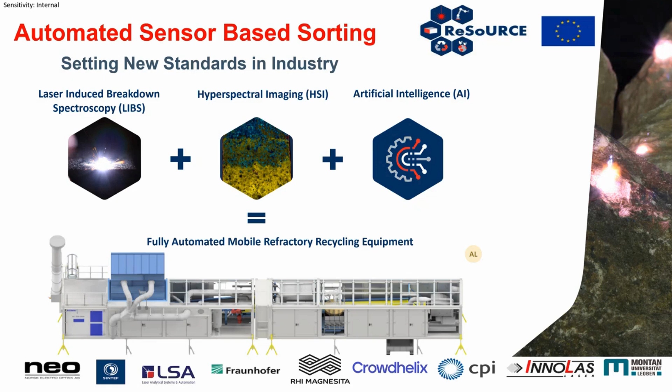So that will be the main aim here, to create new qualities of materials, and whenever we create new quality of sorted materials, this will usually also leave over some other residues where we might not have a full application or the best valorized application today. And that's actually what brings us to this topic today.

And at this point, I would like to hand over to Ananda now. He will introduce further the materials and the project setup here. Thank you.

So this is the ReSoURCE partners. Thank you for your wonderful introduction, by the way, Alex, much appreciated. And this is the ReSoURCE partners. We are a team, and some of these resource partners are also there in this workshop, I believe.

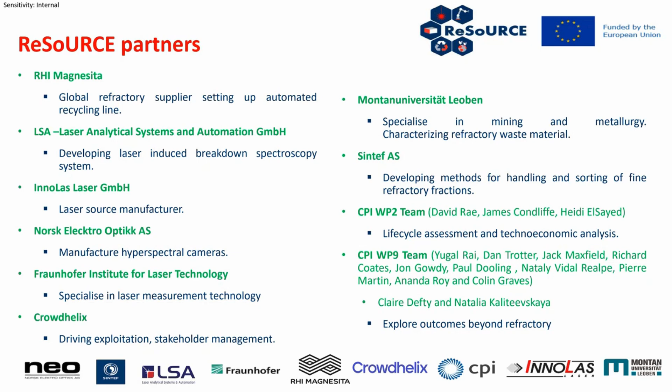And from CPI, we are mainly present in two work packages. The work package 2, which is life cycle assessment and techno-economic analysis. I believe once we go forward with the next few slides, it will be more apparent why this is kind of a very high consideration. But I am representing today from work package 9.2.

Work package 9.2 is a big team where we are exploring areas which are beyond refractory. So we are selecting the material, as Alex pointed out in the earlier slides, which is the most challenging to recycle. That 30% or so fraction of 0 to 5 millimeter, and we are trying to incorporate it into a suitable polymer matrix, and we are exploring new areas of application, whether this can be effectively utilized in value-added applications.

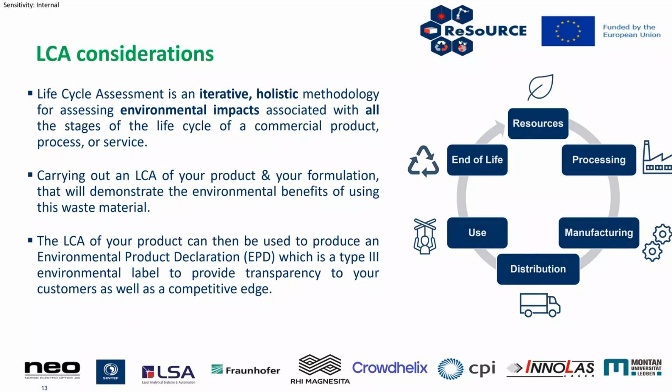Now, in the next few slides, our colleagues will be talking in a little more detail on that. But just to clarify, we will be mostly talking about two materials here. One is a steel industry-based 0 to 5 millimeter size fraction. We will henceforth call it ref ferro. And the cement industry one, we will be calling it Ref Cem.

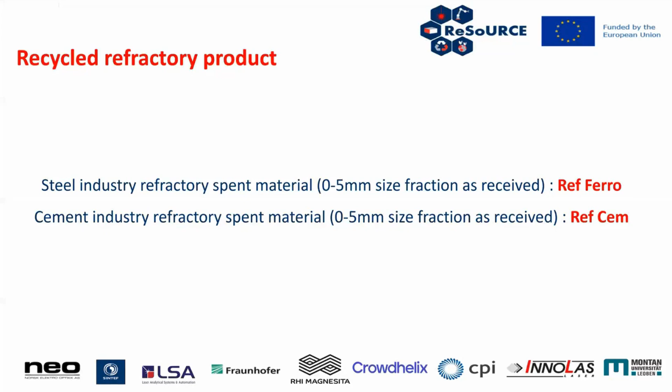So in the next few slides, one of my colleagues, Jack, will be talking about the characterization part. We need to understand this material first quite well in order to incorporate it and to find a suitable application area. And then we will highlight some examples of the application areas that we have worked with. So without wasting any time, I'm handing over to Jack to talk about the characterization of these materials. Thanks, Ananda.

So as Ananda mentioned, these are spent materials. So to figure out how we were going to be able to use these materials and what we might need to do to use them, we began a characterization study.

So we first looked at the chemical composition of these spent materials. And broadly, we can see that they're comparable to what we might expect is used within the bricks. So for instance, we see a lot of magnesium oxide in there and calcium species like calcium carbonate. We see these across a range of different characterization techniques: the XRD, FTIR, EDX, and the Raman.

And we also see some potential impurities which have been added through processes that these materials have gone through. So for instance, we can see potassium within the material from the cement industry, which is potentially added in the cement production process.

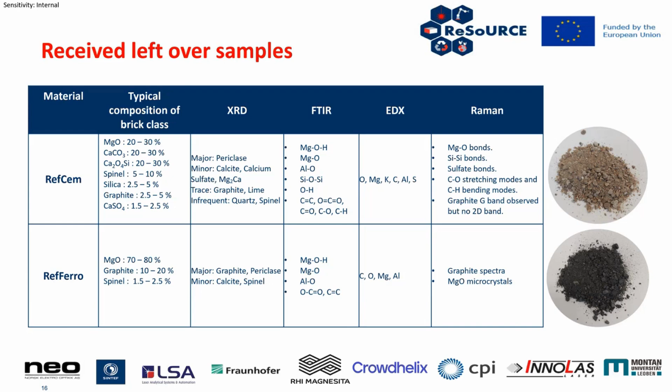We also looked at the particle size distribution of these two materials. So we received two materials that were pre-sorted to below 5 millimeters. And within this size fraction, we see bimodal distributions, centered around 200 micrometers and 1700 micrometers.

And we also looked at the bulk and skeletal densities of these materials. So the skeletal density here doesn't take into account pores and voids when it calculates the density. We see from skeletal density that these are reasonably high density materials, both above 3 grams per centimetre cubed.

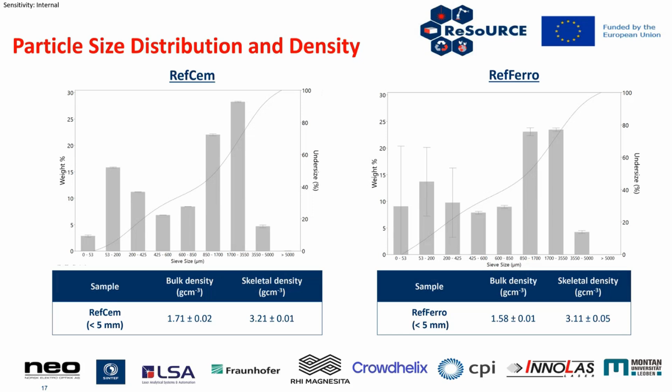We also had a look at the physical properties of these materials. So having a look at the electrical resistivity, the dielectric permittivity, and the magnetic permeability. Whilst we don't see anything that's particularly of interest to us in the magnetic properties, we do see quite interesting properties in the electrical and dielectric properties, and we see a difference between the two materials.

So for the cement industry material, we see a reasonably high electrical resistivity and a reasonably high dielectric permittivity in this material. Whilst for the ferro material, we see it's a reasonable conductor. And again, in the dielectric permittivity, we see that it's an inductor. So, for instance, with the RefFerro material, this conductivity is on a kind of par with carbon black. So that's an area that we could potentially look to use this material in, replacing things like carbon black.

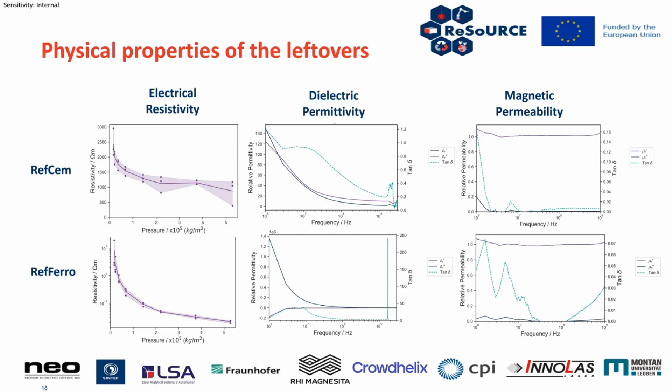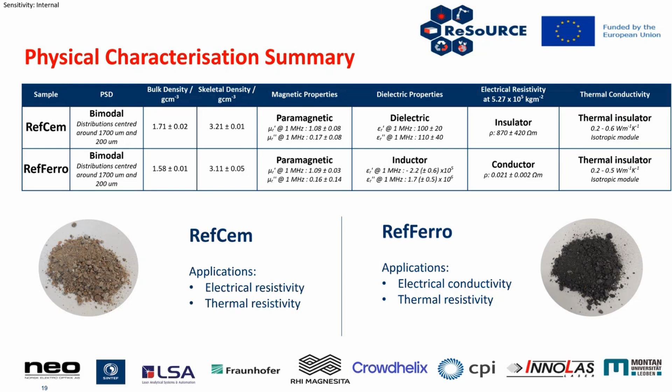So just to summarize there, we have had a look at the characterization of these two materials. We see that they're both bimodal particle size distributions, and their interesting properties really are in the dielectric and electric properties. And we see that we can potentially use the RefCem material for electrically resistive applications, whilst the RefFerro material we can potentially use for electrically conductive applications. Both these materials are also thermal insulators, as we would expect, and so they can potentially be used for thermal resistivity applications as well.

So as these materials have a bimodal size distribution up to 5 millimeters, for certain applications, we realize that we need to do some processing of these materials to put them into applications. So for instance, to put into a polymer system, we need to process these materials down to a size class with a D50 below 10 micrometers. So we process these materials by milling. We first began in the lab on a benchtop scale with about 10 grams of material, using a planetary ball mill to reduce this to below 10 micrometers in size.

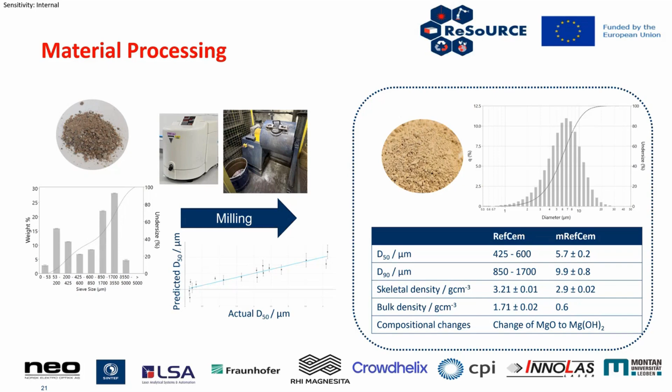We also performed some leach testing on these materials to see if there's any mobile ions present. We can see that there are some mobile ions, and these can be explained by the processes that these materials have gone through. So for instance, with the mRefCem material, we see the potassium and the chlorine that can be expected from the cement production industry.

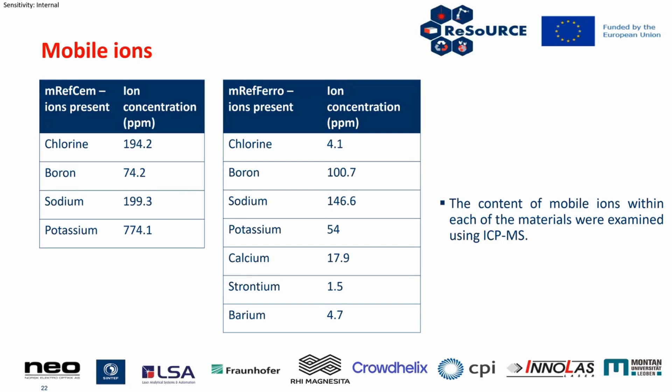So I'll pass over to my colleague Dan now, who will talk about a material passport that we've created to help us identify potential use cases for these materials. Thank you, Jack. So as Jack mentioned, we did then take all of the results from the analysis that we've done of this milled material, this size reduced material, and put it into a material passport for both of the materials. So this is some of the information present there.

So we have some information about colour. That is the colour of the batch that we received. Obviously, with it being a waste material, there's still analysis that needs to be done to see how reproducible that colour is. Also, you can see there the main changes from the magnesium oxide to hydroxide.

And so, residual moisture content. These materials pick up a slight amount of moisture on sitting, about 0.35%, and at 1,000 degrees Celsius on TGA, they lose about 15% of the mass from different compounds. So the loss of water from the magnesium hydroxide into the magnesium oxide, and loss of carbon dioxide from the calcium carbonates. So that is the mRefCem.

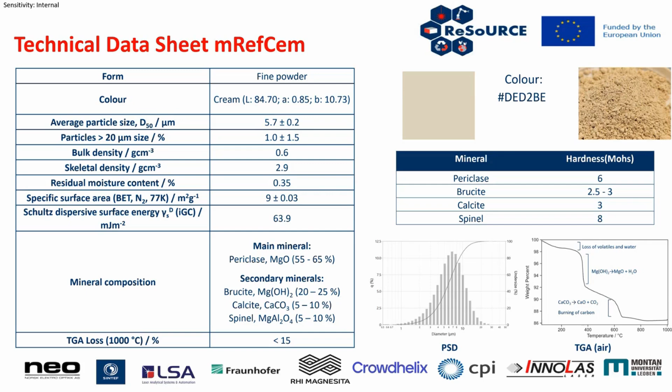We also have the same data for the mRefFerro with similar results, a little bit larger loss in TGA because there is more carbon in the form of graphite in the formulation, which comes off at the higher temperatures. And again, this color is different. It's a darker gray because of that graphite content, but we still need to confirm how reproducible that color is if you're looking at a coating application.

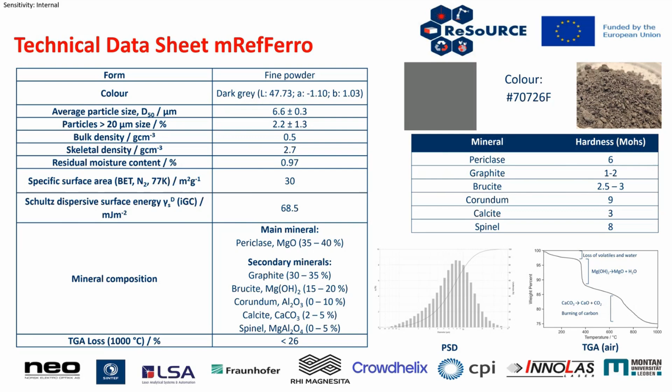From this size reduced, we can also surface modify these materials. So we can use compounds like silanes to treat the surface, to change the surface energies, which allows tailoring of the surface energy of the material to incorporate better into different polymer systems. For example, you can use GLYMO to incorporate better into epoxies, or APTES into a polyurethane.

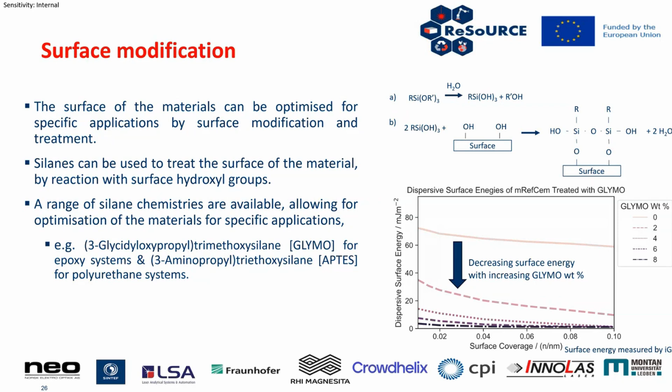And on the right there, you can see the graph where we've looked at different concentrations of the GLYMO on the sample itself. You can see as you load that up, you get diminishing returns of the decrease in the surface energy. So when we're doing applications, we can test to see whether we can put the material in as it is, or whether if we surface modify it, we get better properties from the application. And on that note, I'll now move into some application usages that we've tested at CPI.

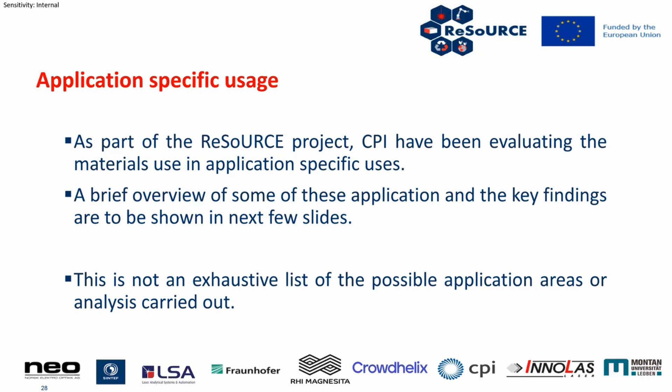So these are just the starting evaluations of different applications to see how they would fit in. We are going to show some key findings here. It's not exhaustive data and not an exhaustive list of the application areas that we have tried or what could be examined.

So the first one is a burning test for suitability used in building and infrastructure related applications, like cladding the outside of buildings. We did this with the help of the University of Edinburgh, who did the burning test. This came from where Jack mentioned before that these have quite a low thermal conductivity. So we're looking to see how it would help in that application. On the left-hand side, we have the setup that was used at Edinburgh, where they heat the sample up until it ignites.

On the right-hand side, we've got the graphs of the raw epoxy, epoxy with aluminium trihydrate, which is the commonly used filler for flame retardant coatings, and then our mRefCem and mRefFerro materials. You can see we do get a slight increase in the time to ignition compared to the raw epoxy with our materials, but it isn't as good as the industry standard aluminium trihydrate. These are all initial look tests, not the full sweep of what's possible.

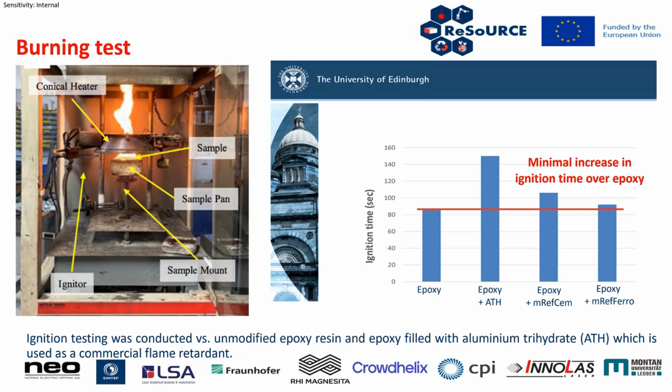So we're not suggesting that we fully replace aluminium trihydrate with these materials, but these materials could be of interest to mix with aluminium trihydrate to improve already good thermal properties of materials by extending that release.

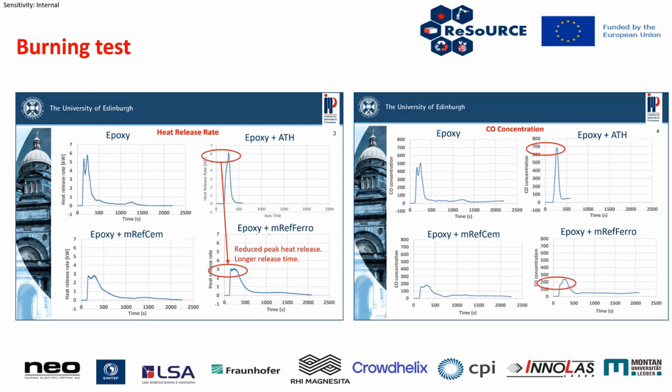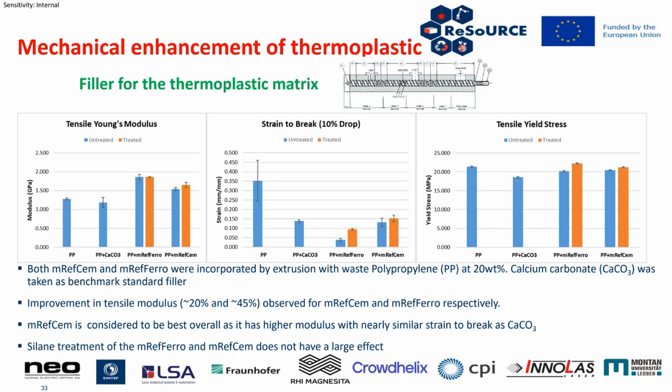Another application we looked at was coatings, performance coatings. So we've started exploratory protective coatings using an alkyd resin system. So what you can see there on the left is the coverage that is possible with just 2 coats of this, the mRefFerro material, on a sheet of steel. So we can get good coverage and a nice base layer.

We've got some ongoing investigations in the mechanical properties, looking to see abrasion resistance, wear resistance of the coating. Can we make a tough coating out of this to protect the steel? We're also looking at potentiostatic EIS, looking at the coating integrity to see whether it could be used as an anti-corrosive coating or not, or whether it would just be a decorative base coating made with recycled materials.

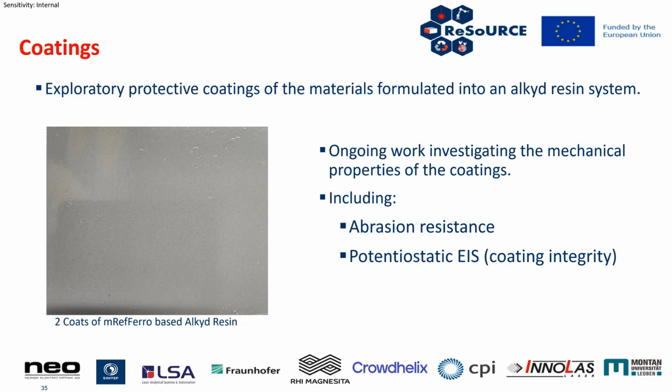Another application that we were looking at was the use of dielectric ink within printed electronic devices. So these are cheap electronic devices that are mass market, they're not high value in and of themselves. And this was in collaboration with another Horizon 2020 project, Sustain-a-print. We have the link to their website there if you want to have a look at that.

But what we're doing is we're looking to replace the dielectric ink in an electronic device. So this is an ink that you use to coat over an electronic track, so you can then print over the top and you don't get interference between the 2 tracks themselves. An example of that is the top middle there. So what we were looking at was could we replace the barium titanate with our material, in this case the mRefCem, because that was the most dielectric of the 2 materials.

And what we found was we could mix this in. It could give us good dielectric properties, but the dispersion itself was poor and the adhesion was poor, which was the same for the reference barium titanate. But in this case, when we surface modify this material, we can improve the adhesion to a much greater degree, and it doesn't delaminate and flake off like the previous formulations, and we get good dispersion and we maintain the dielectric properties. So this was a very good win for the Sustain-a-print project because they could use up to 98% recycled materials in their final product, which was the main target of their project.

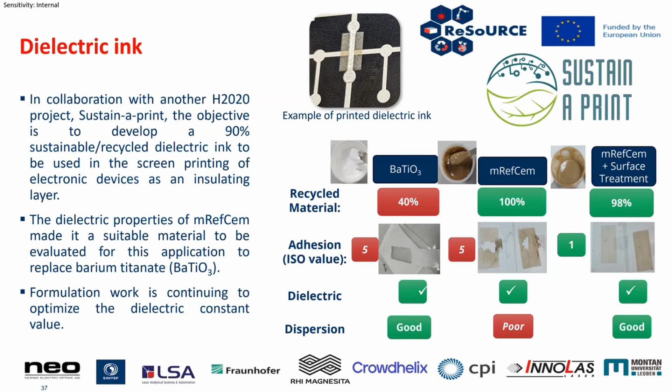So yeah, I've just gone through a few examples of the applications that we've been looking at.